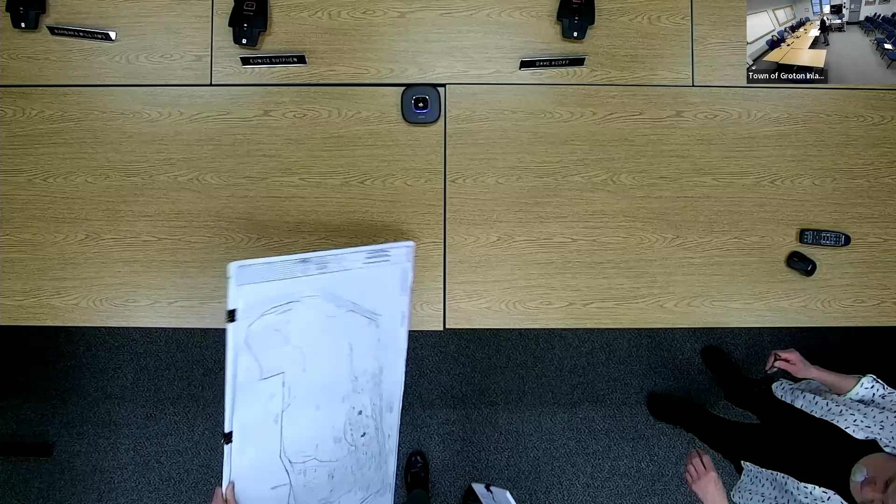And I want to get this going. Go. Deb says it's a touch screen too. I'm so proud of you, Deb. You turned all the lights out. Okay, all right, so you can place it here. Oh, yeah, look at that. That is so cool, so you want it facing you.

All right, so let's do this. You guys might as well look at the screen. This is high tech. No, I'm gonna look at the picture. Wow, very cool. To zoom in more, I'm gonna leave this with you. Sure, tight, wide, okay? So I don't want to screw it up, so I'll just use my fingers, if that works for people. That's fine. Locate where this is exactly.

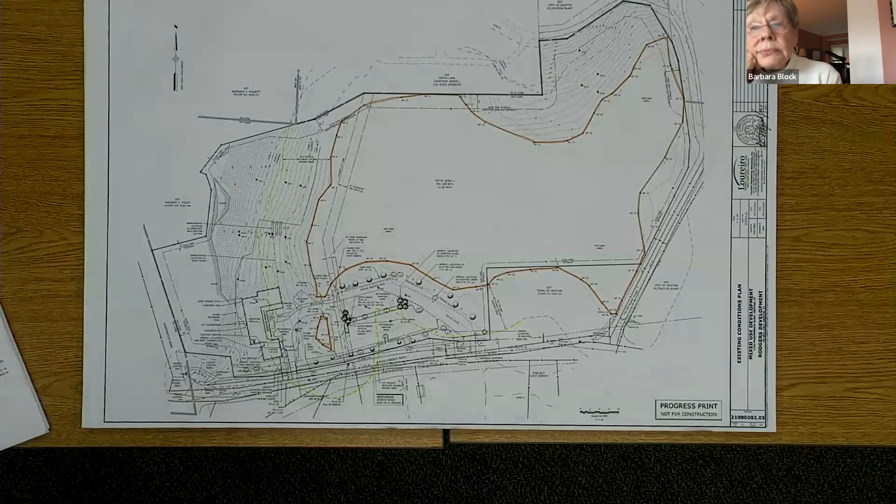The project, 11 Poquonnock, it's located on the north side of Poquonnock Road. Do you know where the old massage school for massage therapy was? Yeah, it's that facility, that's what you're using. Oh, so I thought some bank was going in there. That building is here, that's the existing building here and their parking lot over here. So this we're looking at is the whole entire property. It's 11 and a half acres.

I'll take a step back for a second here. This was before the Wetlands Commission, the Zoning Board of Appeals, and Planning and Zoning, just planning at the time, to actually construct what's there now. So in 2002, a variance was granted for work within the coastal 50-foot coastal resource setback. We'll get to that more in a moment. It was also approved by Wetlands for this, what was a finger in here, to construct this wet crossing, about 820 square feet of filling of the wetland, and also Planning Commission for a site plan application and CAM as well.

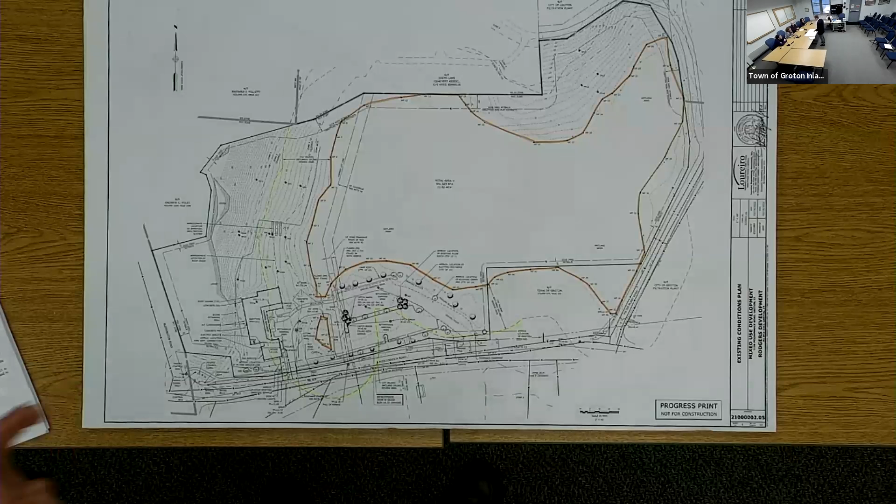So that was in 2002, that was approved, constructed. Last year, we went before the Planning and Zoning Commission for a special permit and site plan application to convert the existing building from commercial to multifamily. There's no footprint changes, it's just internal modifications to the building. But because we're changing from commercial to residential, the zoning regulations require the special permit. So we had that approved a couple months ago. So what you see was constructed in 2002, and the recent modification is to convert this building. That's how we got to where we are now.

So here, like we talked about, the existing building is on the left-hand side, the west property. Buddington Road is just off this page. It's actually two frontages, one on Buddington and Poquonnock Road. But you get to the top of this hill on the property, and it's very steep, there's ledge.

So they don't really use the frontage along Buddington Road, it's all forested. This orange line here is the edge of the inland wetland, and this here is a little pocket of inland wetland. I'm calling it inland wetland because we had Jim McManus out here in February 2021 to reflag the edge of the wetlands, and he determined it was inland wetland vegetation.

So we spoke to Tom about this, and it was previously tidal, why is it inland now? We ended up getting contours out here to determine some of the wetland elevation. Within 50 feet of this line, we got contours of the wetland to figure out the elevations, because the vegetation suggested inland, but we had to compare that with the contours below. The coastal jurisdiction line is tidal.

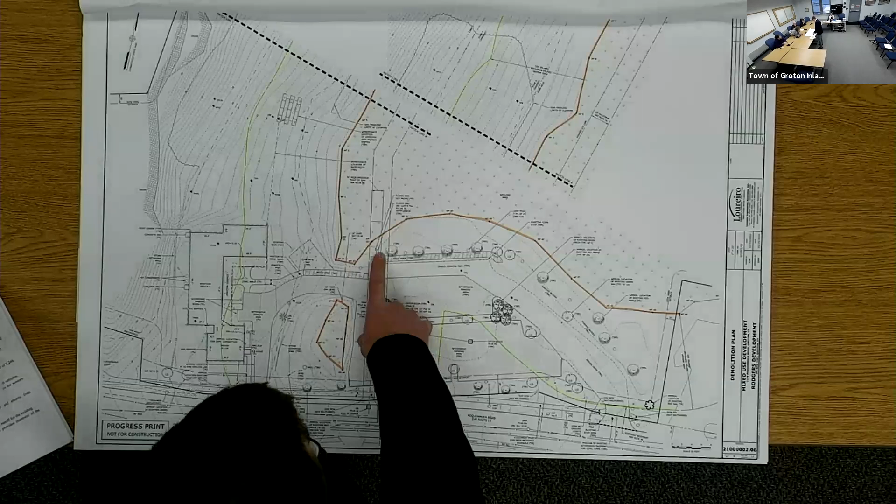The existing pocket now is currently existing, and as you see, the building is existing. There's gas, water, sewer, and electric all within, and the building is connected to those. So that is the existing condition in a nutshell.

Here is the proposed development. Proposed, if I'm familiar, there was a two-way curb cut on the east side, in the middle, to push these buildings a little bit to the east. This gets our entrance away from the intersection down here to the right. We're going to maintain the one-way exit, and we'll get to more of that in a bit. But we're proposing two structures, two buildings that are considered one, because there's a sort of patio structure between the two.

So at the first level, it's all commercial space. Floors 2 and 3 will be townhome style construction, residential units, a total of 13 units in these front buildings, what appears to be two though.

The associated parking lot, the access drive—if you can see, there's a lighter and a darker shade on the pavement areas. The darker shade is the existing pavement that's there now. So we tried to maintain substantially, as we could, the edge of the parking lot. And as it came around here, we had to add a few parking spaces for the entire development, for this multifamily, mixed-use facility.

To the rear, as you progress to the back of the property, we're proposing 10 two-bedroom townhome style buildings in the back. You can see a match line here—this is, I believe, 7 of them, and there's another 3 as you go to the back. This is the high-up part, yes, it's high up here, so we're actually cutting into the grade.

So this upper part, how do you access that with the wetlands? As you can see here, this edge of the pavement comes around, and this concrete pad is kind of our jump point to get to the back. So that's what we've tried to maintain, to fit into the existing development.

This part here is what I'm- this up here, I'm sorry? Yeah, how do you access it? So this drive will continue.

We don't have all the layout because, not because of anything other than oversight, but I thought it would be easier to review these documents. So I'll turn it around. This match line matches here, so you come through here, once you hit here, you come up here. This is confusing - I had the same issue when I was going through my presentation myself. So yes, this is a match line, all of this.

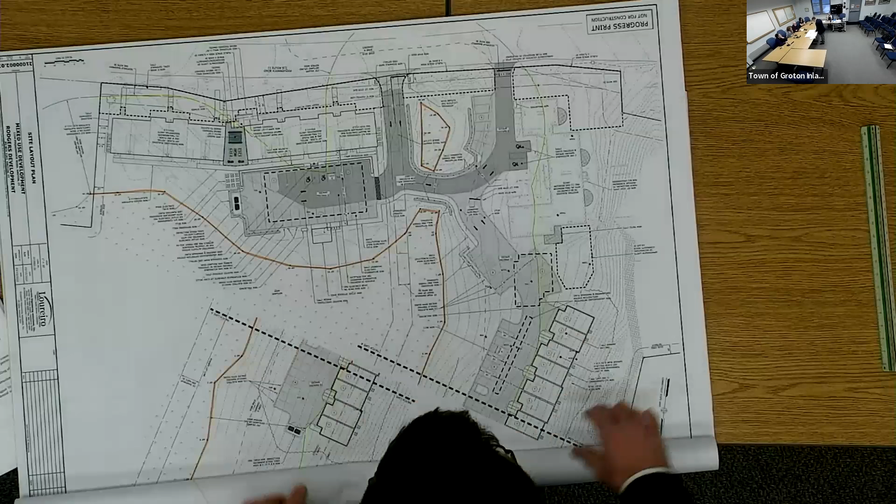So this match line, we take these and move it over. That's how you access the back, just two of them set. What was your question about the different parts of the property, scale, distance? Oh yes, your 20 scale.

So to the edge of the backside of the wall, it is 7.5 feet, 7 feet. How about this way, towards the driveway? In this direction, you're saying? Yeah, so I guess the closest you're about 7.5 feet there, and as it comes around - is that what you're looking at in this direction? It's pretty close, 8 feet, 7 and 8 feet.

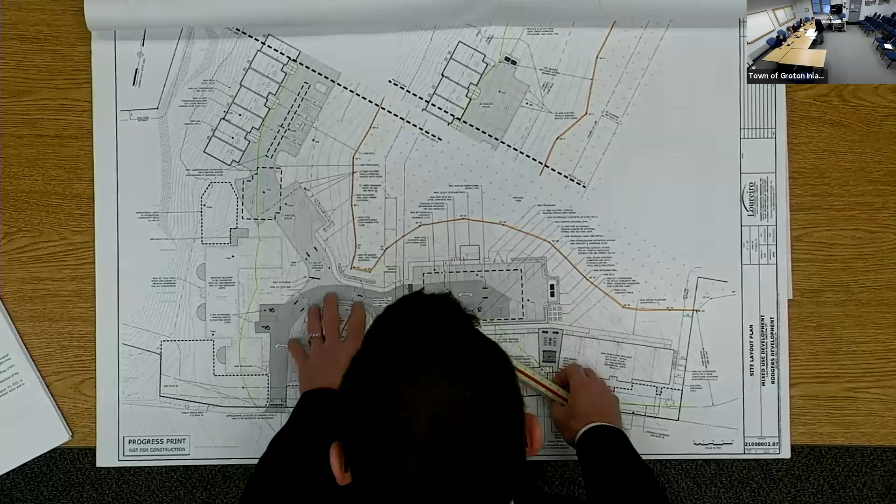And the reason I should clarify the walls - we tried to maintain the edge of the parking lot here, and the parking lot plus the walkway, but we have to put these retaining walls in for the grading purposes, for stormwater purposes, to get the runoff to the stormwater on this side. We actually have to raise the area a little bit, and rather than filling into the wetlands, we're proposing retaining walls to be able to get stormwater from this point to this point.

Where right now - how about the driveway, can it be moved over? In which direction? That way, to the left. Which driveway, this driveway? Yeah.

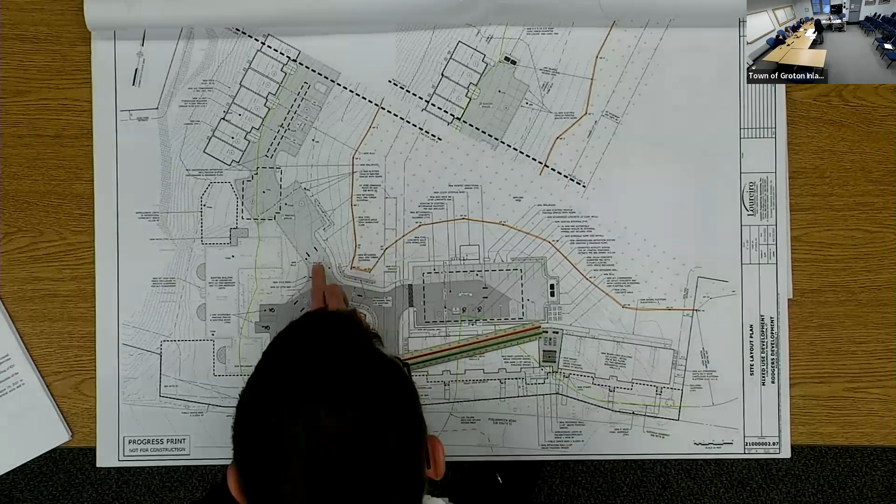So the existing, if you remember, the existing concrete dumpster pad is right here, and we tried to angle this so we could skirt by the corner of that building. The dumpster pad is here, so it's...

Yeah, so we haven't walked this since - yeah, we should do that, we need to walk it. Yeah, we haven't walked it since it was built out in 2002.

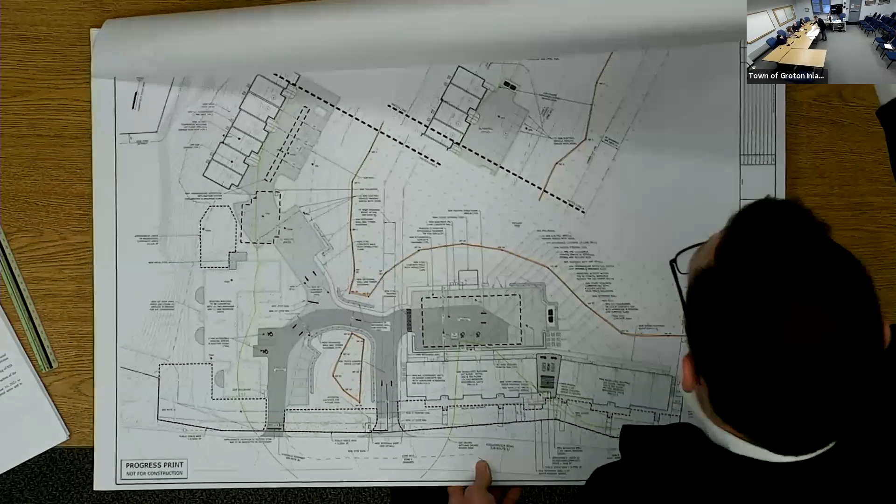So there is, I'll go back to it again. See, this is the edge of the pavement we're trying to maintain. We're trying to hook it around here and then concrete down, so we're trying to almost extend that just past here. So if you go back and forth.

That's not a driveway. Correct, but that was the best opportunity to get to the back of the property. You have to skirt by the building.

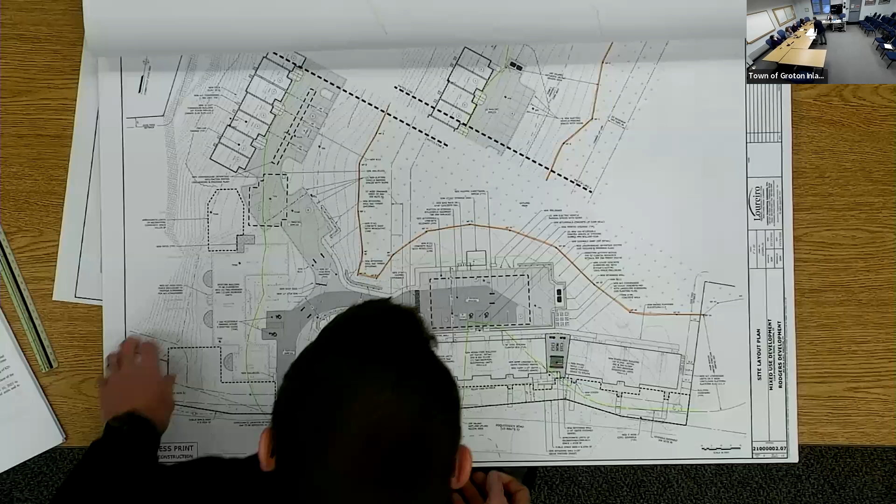That will be turned into a driveway. The dumpster pad will be removed and asphalt installed, driving over it. Why not just leave it? I think it'll probably be too much of a bump, and I also don't know what the grade is of that.

We're manipulating a little bit in this area. So, sorry, I'm off track. This site plan for the stormwater plan, I'll flip to that next.

This is the grading plan. As I mentioned, there are actually two separate underground detention systems, detention or infiltration. The system here is a detention system. We didn't have the depth of groundwater to do an infiltration system, so we had some in this area already. What we're doing is installing these detention systems with iso rows to treat water quality.

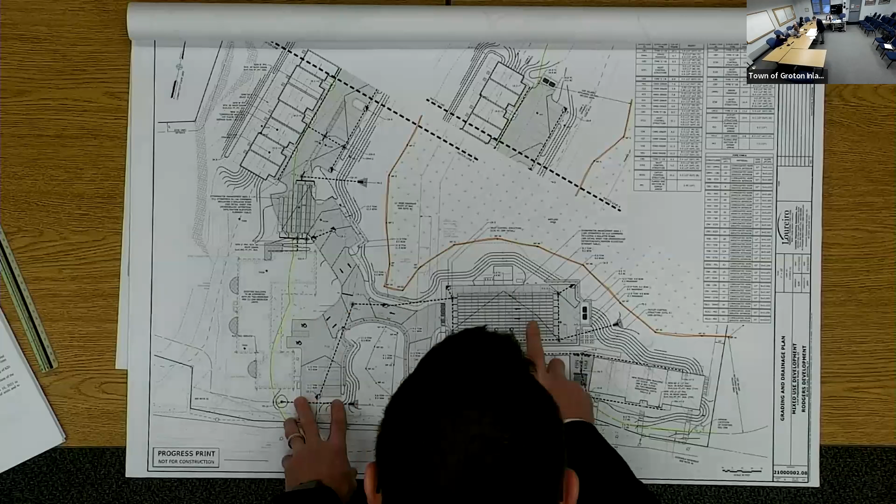Now the fill you're showing behind your first building, is that already pavement? Much of this area is paved drive or gravel parking, or grass - not all of it. And those contours are already there? These contours are proposed, so you're adding material there. Yes, correct. They're 1-foot contours, all close to the wetlands.

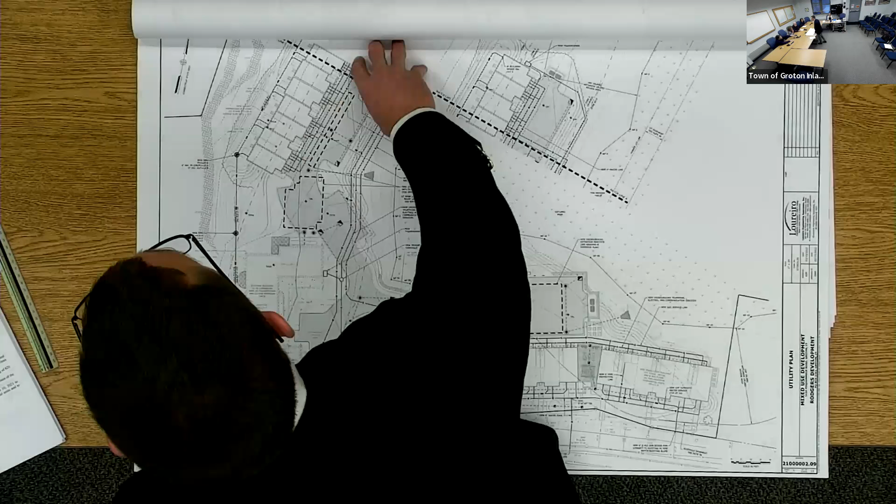Where's the front of the townhomes? This is the front side of the townhouse. So they face the wetland? That's correct. What about the one on Route 1?

These substantially face the street as well. There is an entrance - they face that way, and the back, and the garages are... so there are no garages for these? For the mix, there's 10 garage spaces for the townhomes to the rear. So those people just park in the parking lot? That's correct. And so I say the front of the building is along the street, but access is in the front.

On the first floor, gotcha. And they face Route 1, whereas they access the condos from the parking lot in the back. Oh, I didn't realize there were stores. Yeah, this is the first floor.

Those parking spaces are between these spaces here, and there's also some spaces connected via a walkway and a crosswalk here, so any of these spaces can really be used by the commercial developments.

Do you also own that piece of property to the right of this? That's a town property, and the owners were hoping to work with the town to get some over here, but I think we're on a quicker pace than that's going to allow. So it's something they're looking to consider in the future. That used to be a gas station.

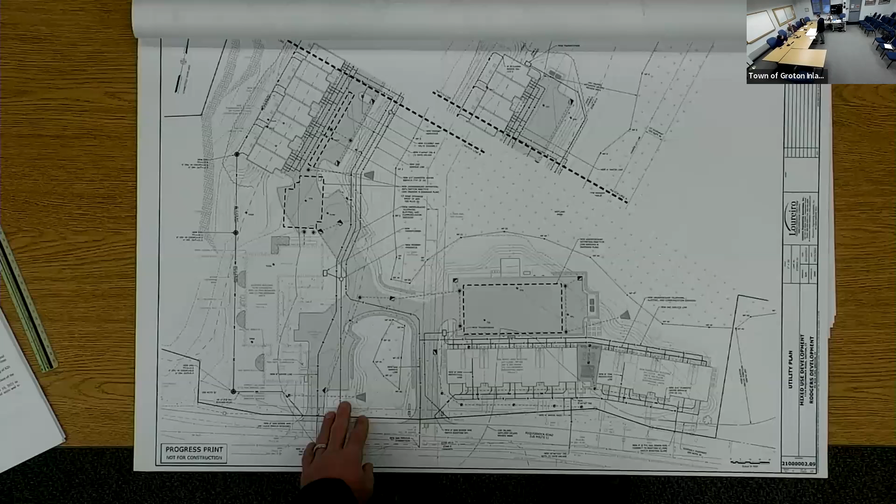About 5 acres. No, just a comment on the town site.

1955... let's keep going to 1960. It got filled in by I-95, and that's why there's contamination.

Contamination was from the gas station's underground tank.

This is the E&S plan - construction entrance, temporary fence, temporary hay bales, silt fence. There's probably two temporary sediment traps as well, with diversion swales to get any runoff collected into those temporary sediment traps.

What marks the rectangle with dotted lines? That's the down-gradient edge of the proposed grading, which you can see the proposed grading is fainter here now.

I assume you did borings on the first building - what's down below, how far down? For structural design it's alluvial soil in there, so they haven't gotten to the structural design of the buildings yet, though they do have some pictures of what's here, but not what's down deeper.

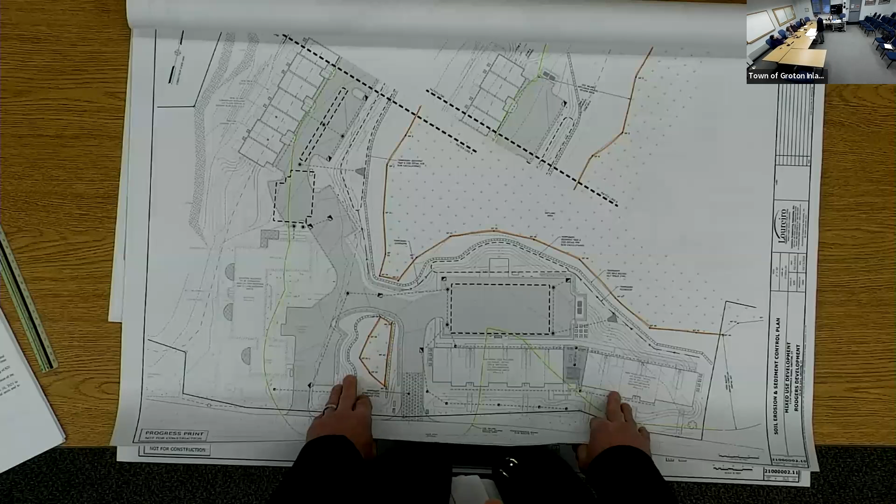That's why I asked - that's good to know. I'm sure as the architect and structural engineer get into it, they're going to need that information, but as of now they haven't gone to the actual structural design of the building. It's just kind of a footprint at this point.

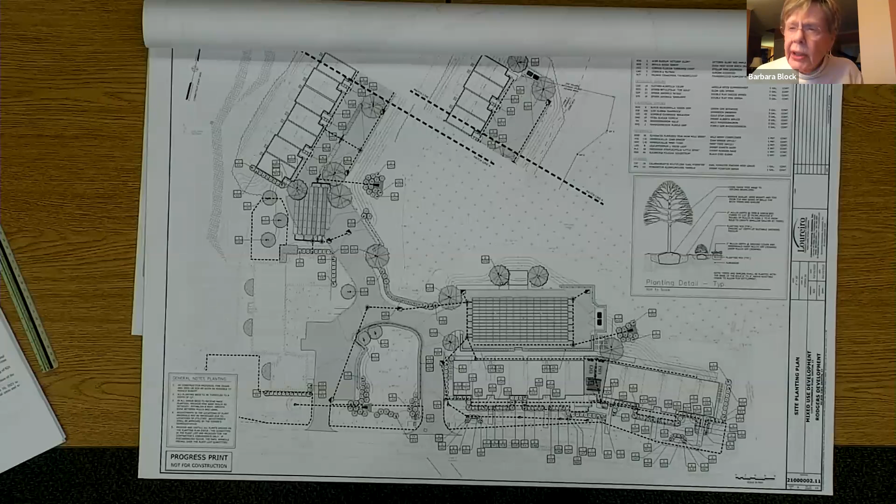Thursday afternoon I have a short window, 1 to 2 o'clock, then I have something again at 4. So if we could do it like 2 o'clock or something - 2 o'clock on Thursday would be good.

We'll meet on - not me, I'm actually out next week as well. I'll have somebody meet, you can bring your kids - we're going to be in Florida unfortunately.

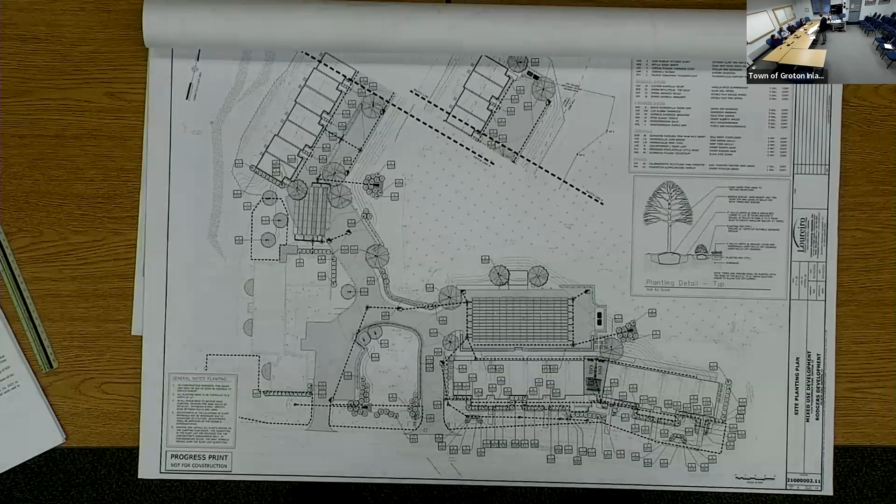All right, next Thursday then. The main thing is just to get to know, obviously we're going to see what's out there.

But to really get a feel for what they're proposing, so if they could mark - your test pits are all set, can you put some stakes in for the edge of grading, at least for the front building and then on the rear buildings, and the edge of that new parking lot behind the front buildings too, please. Yes, the grading - perfect.

And then maybe discharge points - so you were saying around here?

Not used to a fountain pen. No, this is fun, nice and smooth - I should do calligraphy.

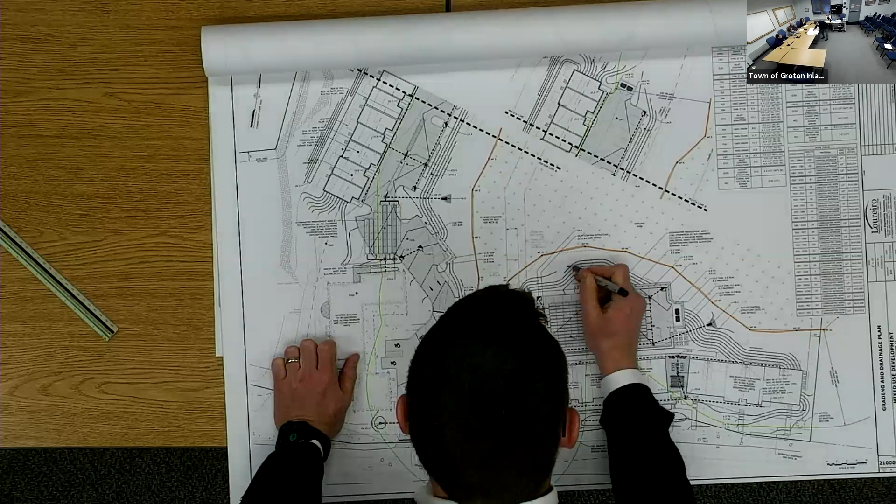Along here, yep. Okay, and then stakes in the back, grading, and then the discharge - and maybe mark the discharge on that other one too, please.

There is actually a third drain, which is this yard drain, just collecting runoff behind the building. We're getting underneath the pavement and it's discharging in this location. So rather than coming across the parking area, we're collecting it on this backside and discharging it on the other side. And it doesn't exist now.

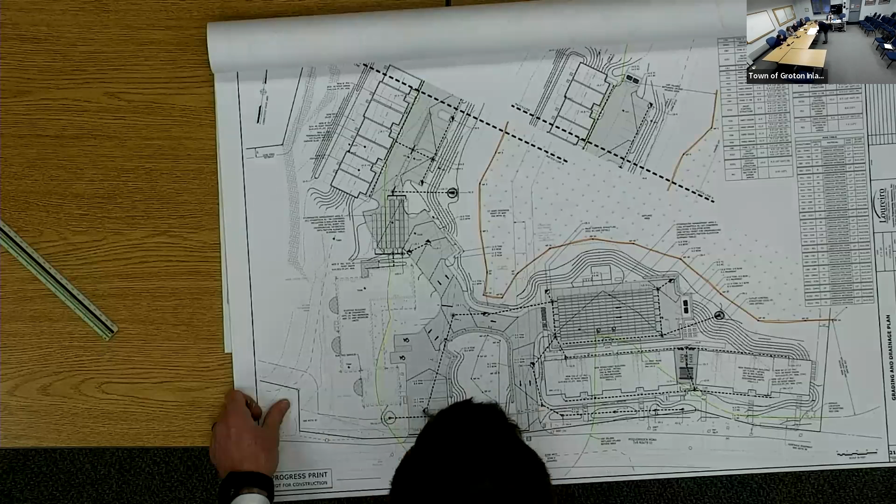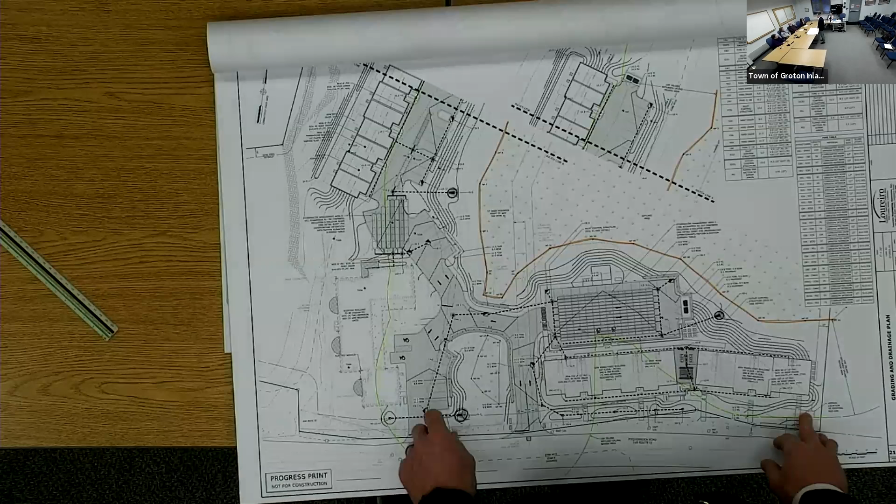It doesn't exist now. Go ahead and do that too, please. Leaving that one little patch on the top back open. Right now it's empty, until they stick another two buildings up there. So that is empty right now.

Would that have to be accessed from Buddington Road, that part? Yes, the wetland spans the whole property there. Not Buddington Road, I'm sorry, it's the filter pond.

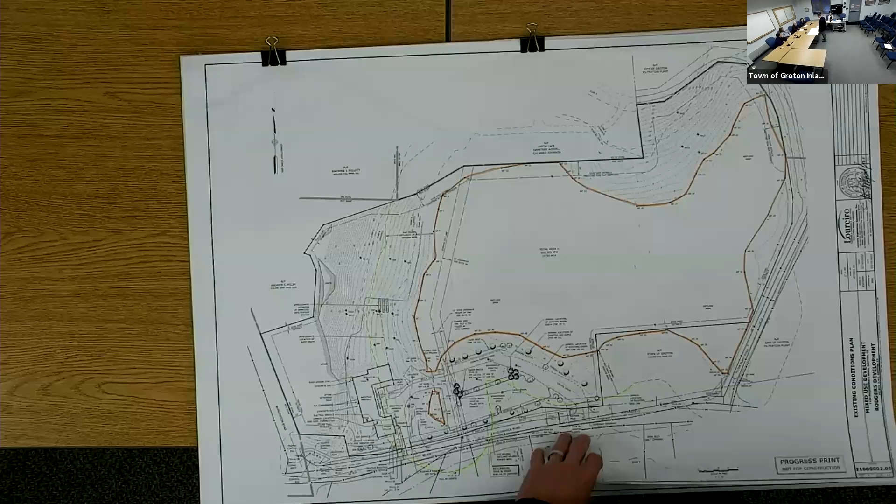By the cemetery, back to the cemetery. You've been down the filter plant road, Barbara, don't you remember? The reason I asked about the soil is during these rivers were big and they produced an alluvial sand along the sides. That sand is what they're mining up on the town property, and they sell it and use it in the filtration plant. And that continues on down through.

And I know it's not over here, but down there you may get a surprise when you go in, because it could be 30, 40, 50 feet thick. Oh, interesting. Well, that's something we'll definitely have to start considering immediately then. It could cause them a few gray hairs. Understood, perfect, thank you.

Thanks for that. On the other end of the state, many years ago, they built houses on wetlands, back in the 50s, two-story houses, and they all went. You can see that.